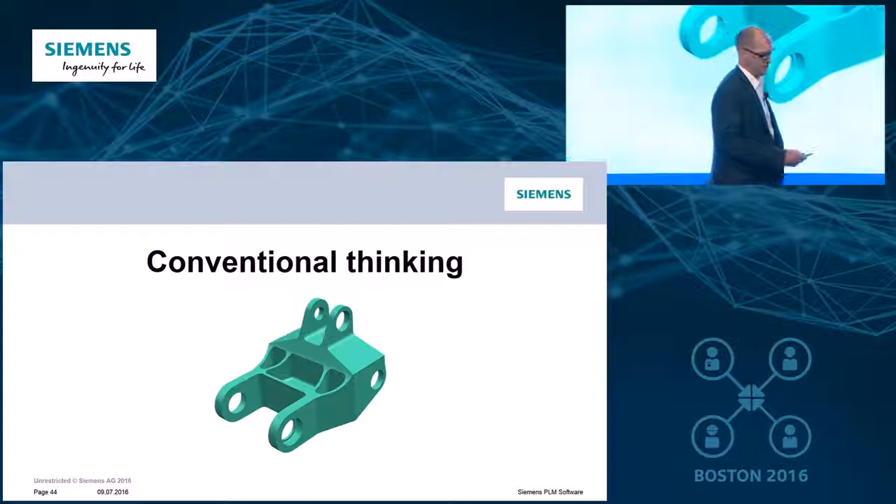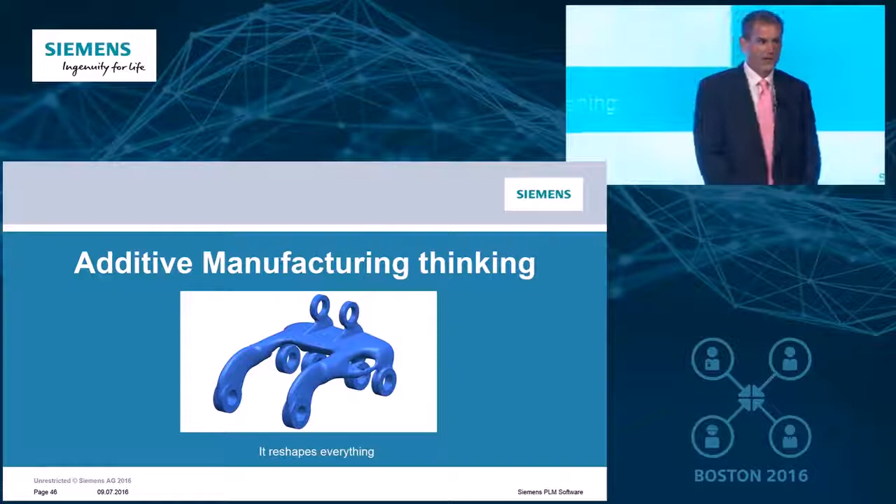Now is the time to rethink everything, and we believe now is the time to adopt additive manufacturing. With additive manufacturing, we can now create new designs that are lighter, stronger, and never before envisioned, and we can manufacture them in an agile, cost-effective process.

Here we're comparing the difference between conventional machining and additive manufacturing. On the left, you can see conventional thinking: a block of material that's been set up on a machine tool in a couple different orientations. You can see the different machining operations, the drilling operations, drilling the holes, and the machining operations removing material, so we end up with this final target shape of the part we're trying to produce.

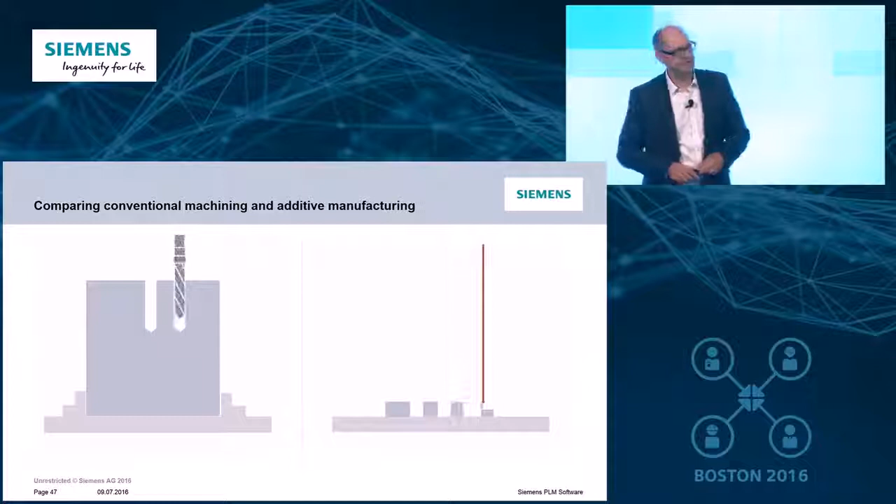Now, on the right-hand side, you're looking at additive manufacturing. Here we're able to produce a part in a single setup. The shape of the final part is very unique, very organic looking, something we couldn't have manufactured using a CNC machine tool. And on the inside of this part, you can see a honeycomb lattice-like structure where we've been able to take out a lot of material while still maintaining the structural strength of this particular component.

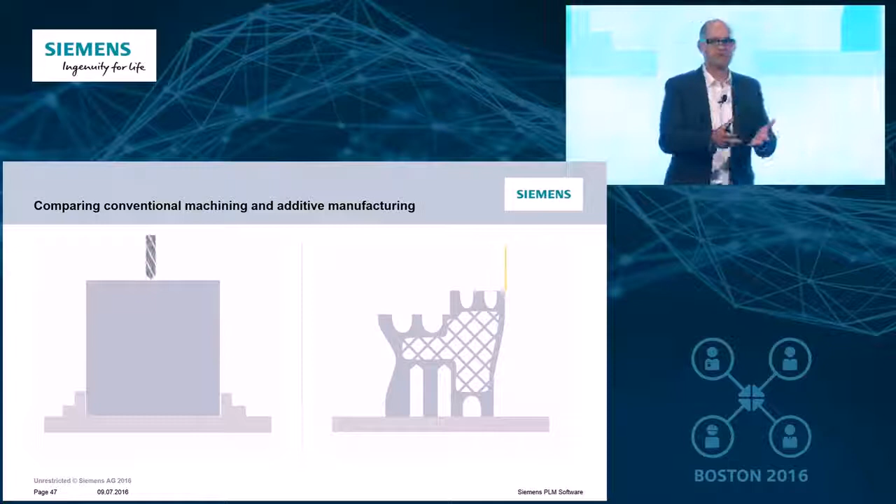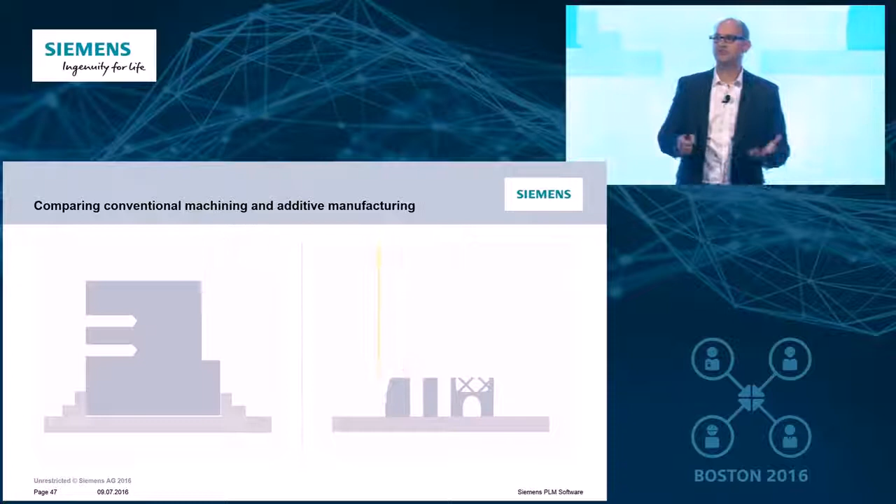It's these new types of disruptive, innovative technologies that are really going to change products forever. It's time for us to start rethinking everything.

This aircraft was designed over a decade ago by one of our customers, One Aviation, who thought differently about air travel. Using the latest technology available to them at that time, they pioneered a new class of jets, the very light jet. Aerospace engineers used NX for modeling, human-driven calculations, supplemented by CAE simulation optimizations to design a very lightweight, cost-effective, high-performing jet.

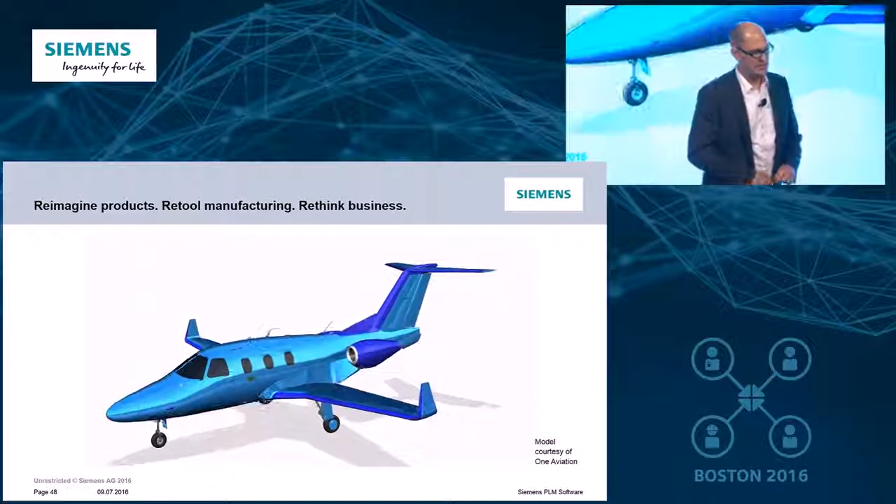But we've wondered: what if we could redesign this jet using the technologies available to us today? What would it look like?

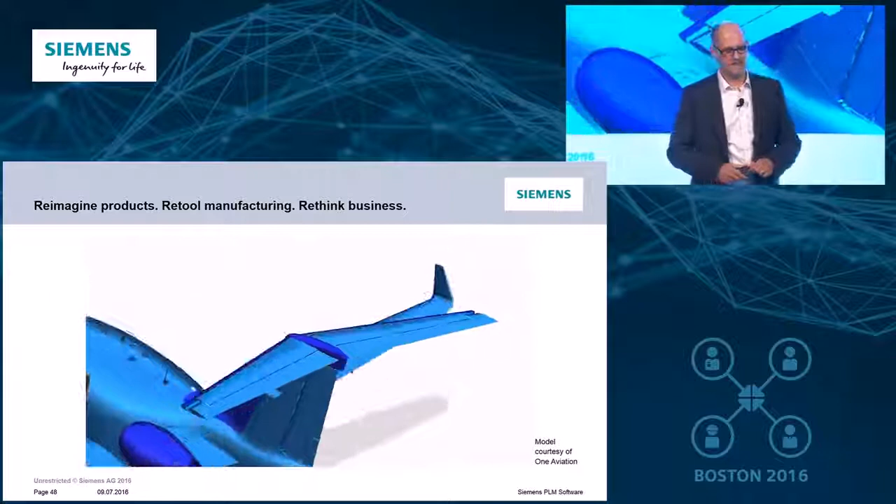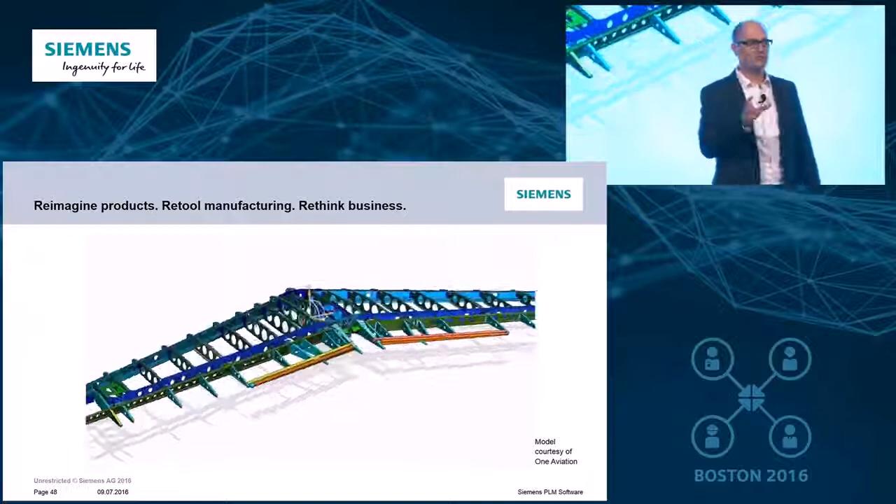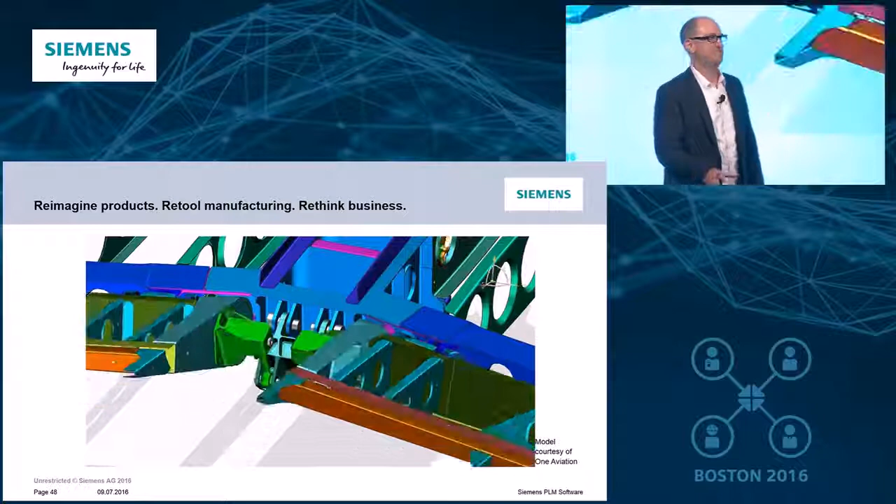Now, we don't have the luxury to redesign this entire jet today, but we can zoom in and look at one component of this aircraft, the elevator bell crank in the very rear of the tail. This is a critical component to the control systems of this aircraft. It connects the actuation of the pilot's joystick mechanically to the elevators in the back of the aircraft that control its pitch.

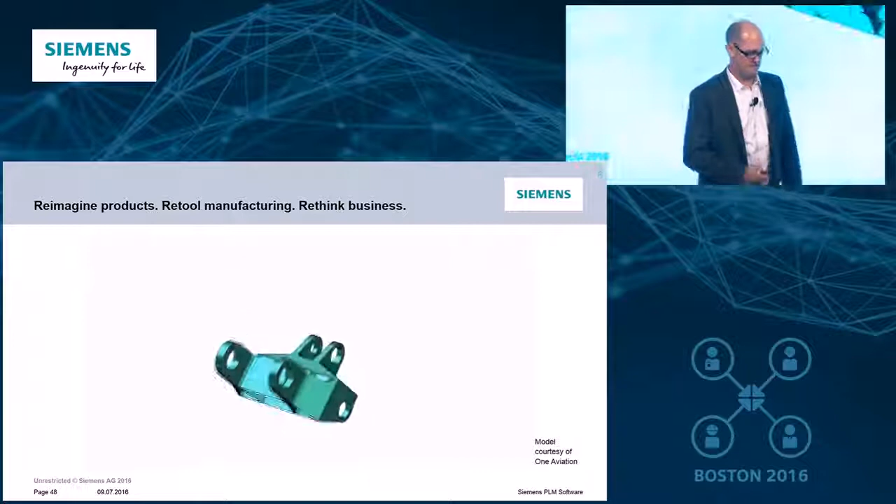So let's have a little bit of fun. Let's try to break through some barriers. Let's apply additive manufacturing to reimagine this bell crank and try to design it lighter, maybe even stronger, so that we can increase the payload of this aircraft. Maybe we can now take an extra passenger on board with us when we go on a trip.

As engineers, what we do today is set up requirements and goals using analytical methods to help us define the physics that govern product performance. We use tools like Excel, intellectual property, prior knowledge, and even Google to set up these calculations. The problem is they're not tied directly to the geometry which they need to create. We believe there's a better way to do that.

What we want to do is take all that math now and directly tie it into the geometry which it's going to need to create. So what we have is Paul now working on a change request.

What Paul's going to do is use Active Workspace embedded in NX. Being a designer every day, he doesn't have to go to another tool—it's right there, he has access to all the information he needs. The request here is he wants to lighten up the elevator bell crank.

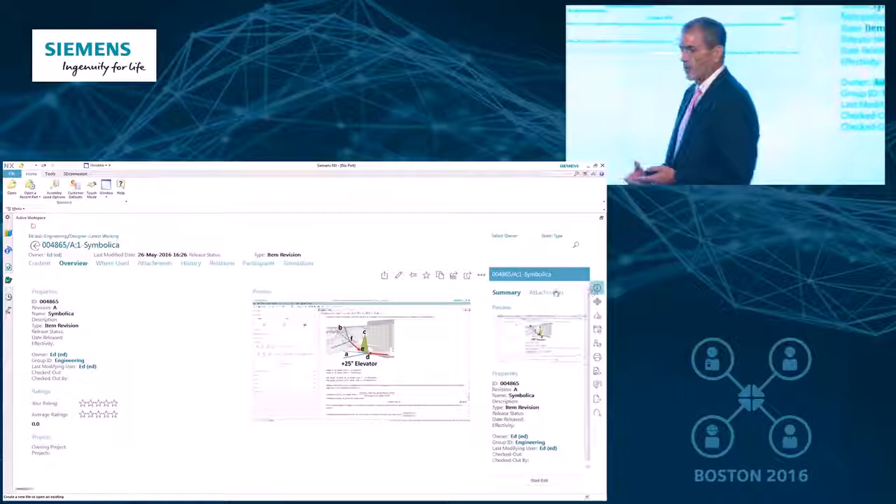As he digs down through the information that was sent to him, he comes across the set of equations and math that dictates the performance for this part. He's going to launch that part directly from inside his CAD tool into the Symbolica tool, which is the rich math engine where we can set up all the calculations we need.

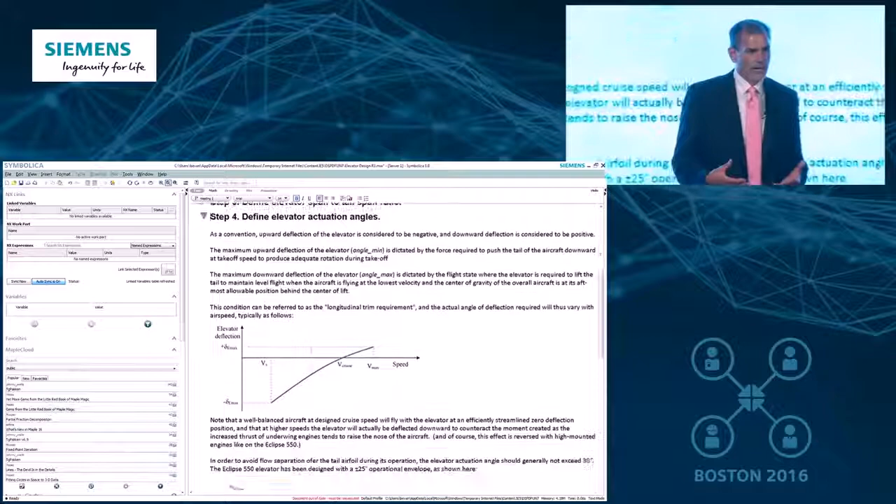Within Symbolica, it has the step-by-step processes of everything Paul needs to accomplish, and he can look at it. It has all the pictures and images pulled from CAD so he can get a nice view of what he needs to do.

What he's going to notice is it might be a little out of date, so he's going to quickly recalculate the entire set of equations at this point in time.

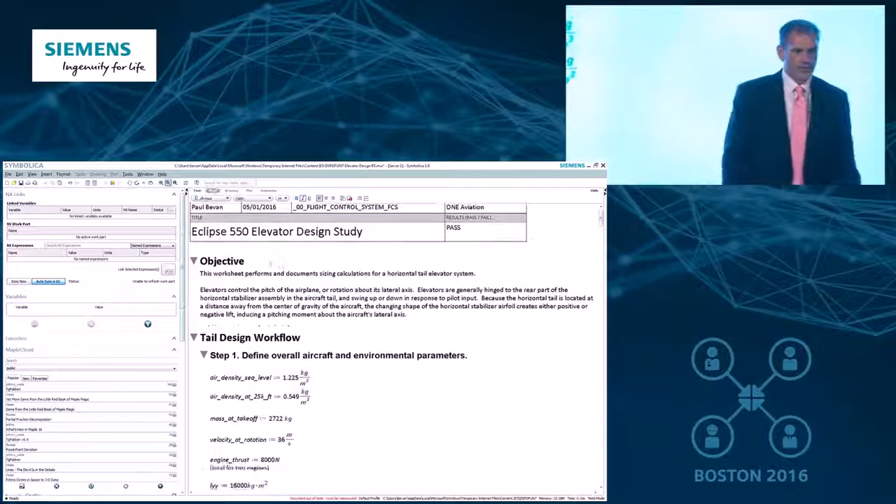As you look at that, you can see all the numbers and all the text in italics are live equations. At any point, Paul could pick on those, change values, interrogate them.

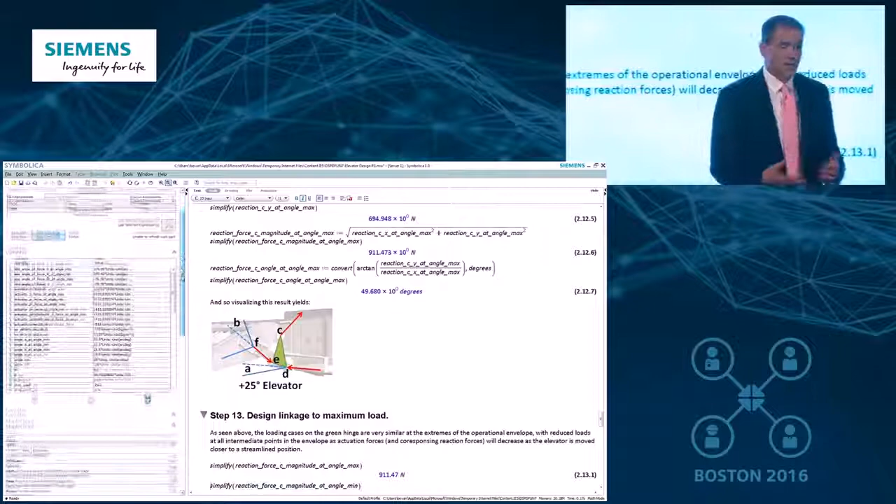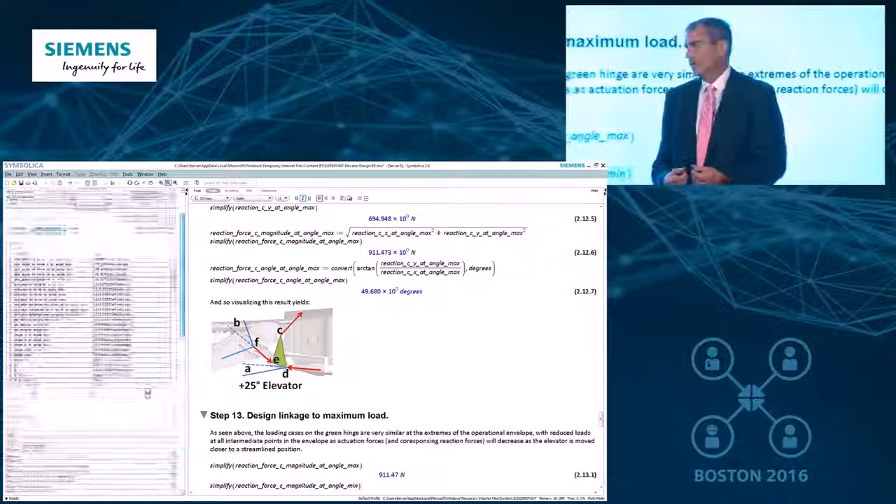On the left-hand side, he has a table listing all his variables and their present values. On the bottom, you can see all the rich math functions that can easily be put into Symbolica. And if anybody's tried to do high-level math with Excel before, you know how hard that can be.

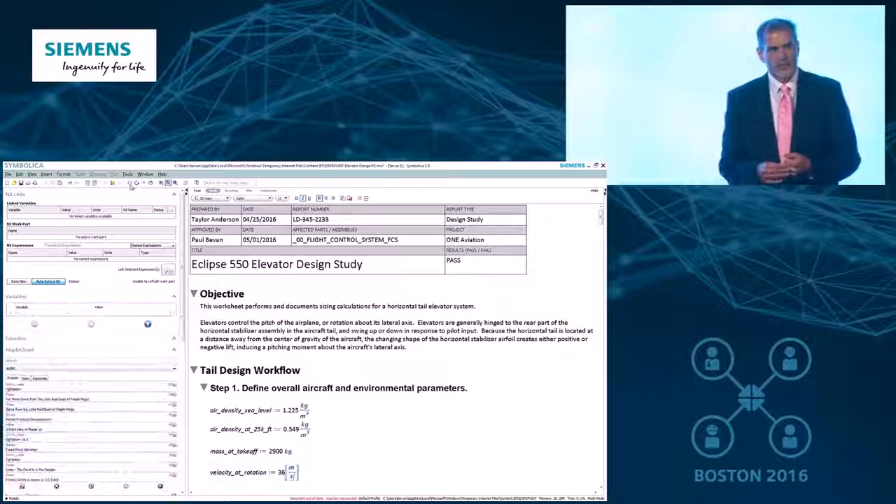The other nice thing is, as Paul increases the mass at takeoff here by a couple hundred kilograms and recalculates everything, the beauty of having Symbolica now is I can use these values and tie them directly into CAD.

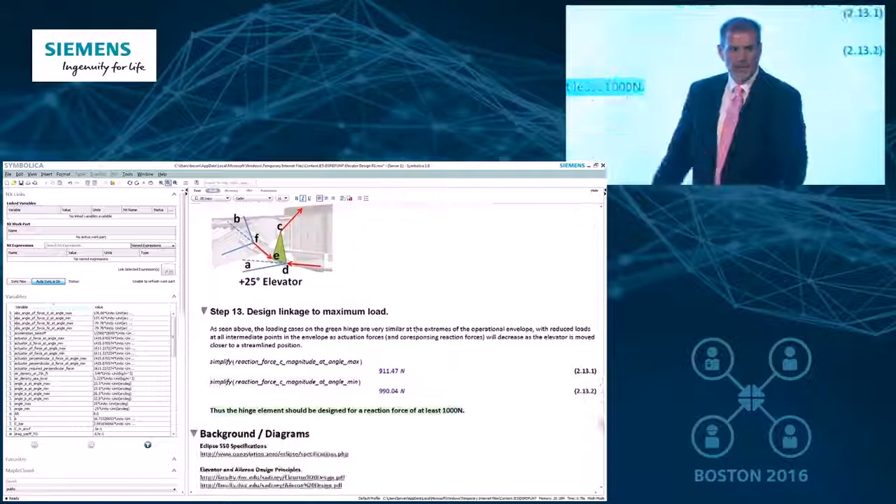And it's bidirectional. I can push these values into my CAD models, and as I change my CAD models, the values can come back here to retrigger all those calculations.

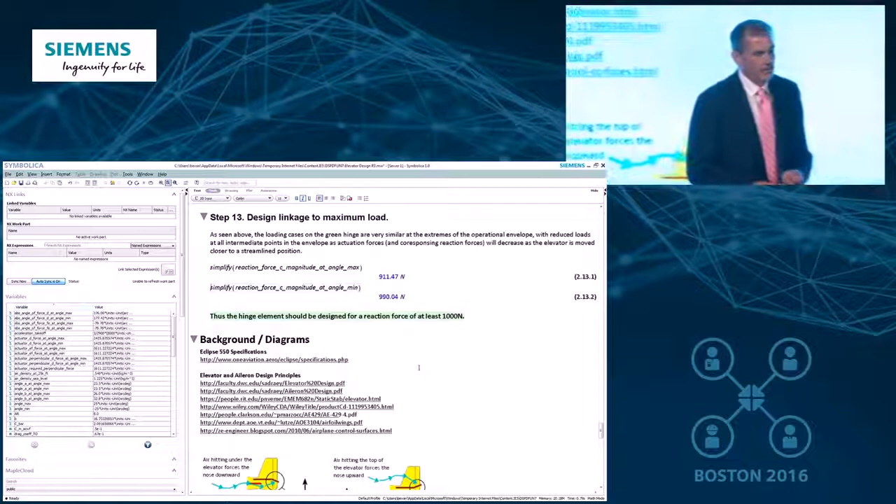So we can see now, when Paul increases the mass at takeoff, he has to worry about a reactive force on the elevator bell crank of about 1,000 newtons. We'll use that number later on in the next demonstration.

So really what we have now is intelligent models that can unleash our engineering potential within our organization. We can tie it all together.

The next step we're going to do is optimize. Today's optimization usually occurs after an initial design has been created to get an incrementally better model, and this optimization is usually performed by a CAE analyst using specialized tools after the initial design.

But this might not be the best way to do it, because these optimization routines can be biased, and they can be biased by many things. One is the existing geometry we started with. Number two is the not-invented-here syndrome, and even the emotional attachment people have to their designs.

So what we want to do is use the power of the computer and give the optimization to the designers early on in the initial design phase during ideation, where these biases can be eliminated, because the computer has no bias about existing design—it's just going to do what we ask it to do.

So what we want to do now is go back to the demo. In the next one, Paul has opened up the entire elevator assembly and he's going to focus in on the area of the elevator bell crank.

And what he's going to do, like Aaron talked about before, is imagine a brand new design. He has some stuff set up to run the optimization here, because we have to tell it what we want to do. When Paul goes into that area for the optimization, he needs to set up a design area.

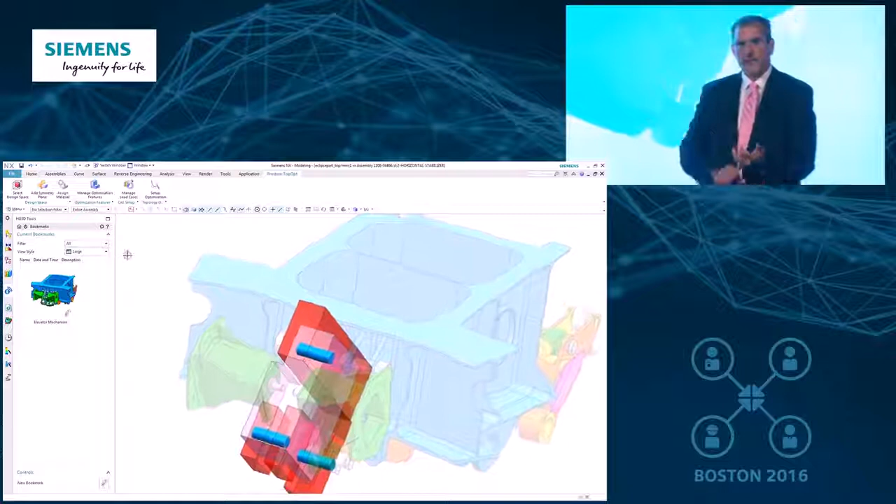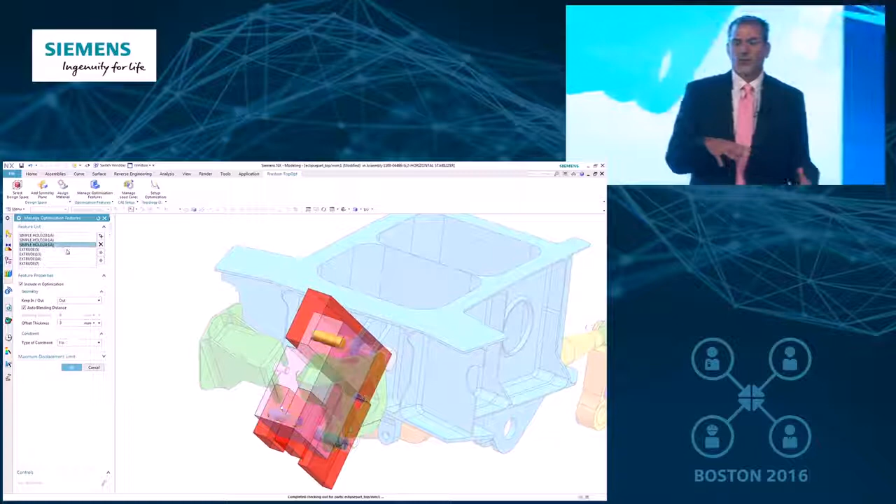He needs to set up material types, and he can add symmetry to it. The one he's going to do here now is go ahead and manage the optimization features—within this design space, what are the areas we need geometry to stay, and where can we take geometry out of?

For instance, a couple of these areas he has holes where there's going to be pins, and a couple other areas need material around the holes to put the other pins in.

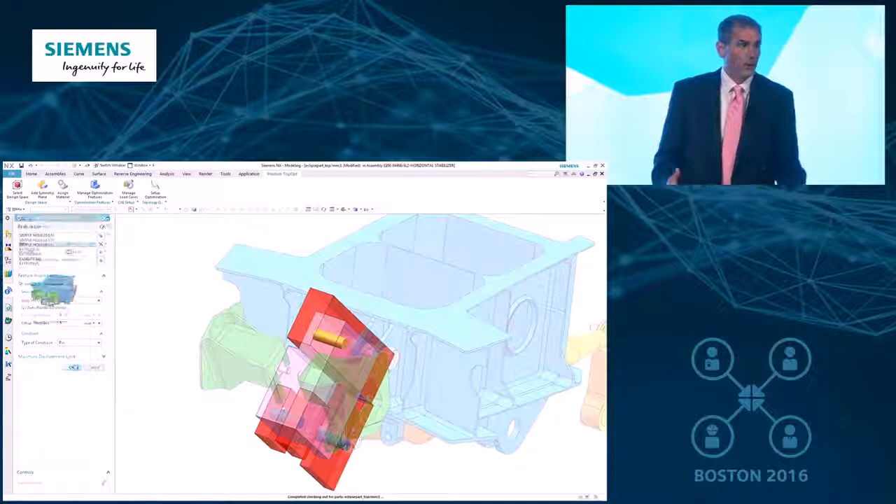Then he's going to manage the load cases, which were calculated before using Symbolica. Paul's going to go in here now and make sure all our loads are all set up, and once that's done, he's going to run the optimization as a designer now, not as a CAE analyst.

So let's think about optimization for a second, because to optimize means to make perfect. So what Paul's doing now is he's making the perfect design based on the inputs he gave it. And what does it really mean to make perfect?

One customer once told me a perfect design is like this: anyone can build a bridge, but only an engineer can build a bridge that'll barely stay standing. That means it's perfect, right? You use the minimum amount of materials to get the maximum amount of gain.

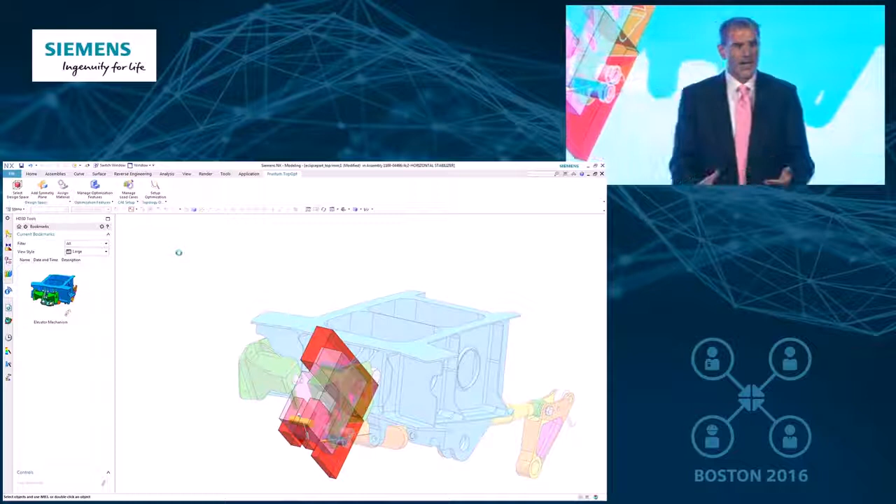The other thing it's doing behind the scenes, as Paul's doing, is generating multiple designs and multiple iterations, running through all the solutions it can do. And it's going to give us back the best solution it can.

One thing we'll notice when we're done is, remember the original part that Aaron showed? The original elevator bell crank had a kind of stress path that went along this way. And when we get the new design, you'll see how it maybe is a little bit different.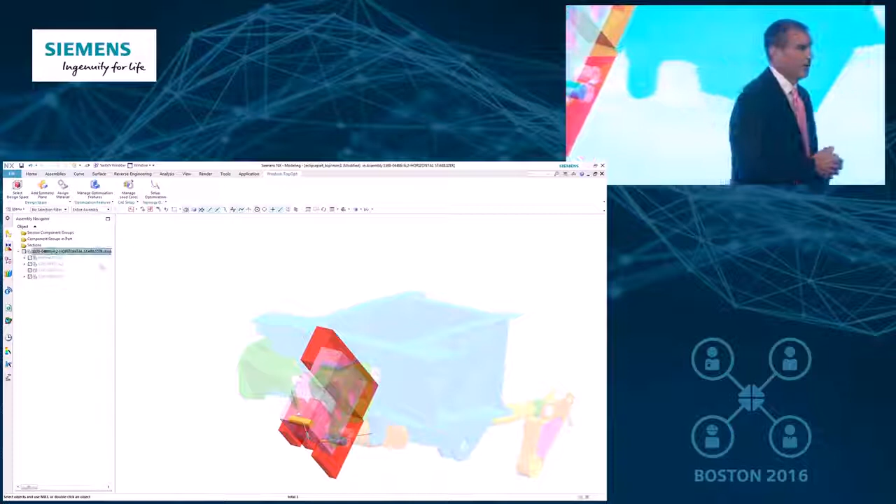So the design is all complete now, so we're going to go ahead and look at what kind of shape we came up with. And when we look at the design, not only do we talk about which way the stress is going to go through that part and where it's going to bear all the weight.

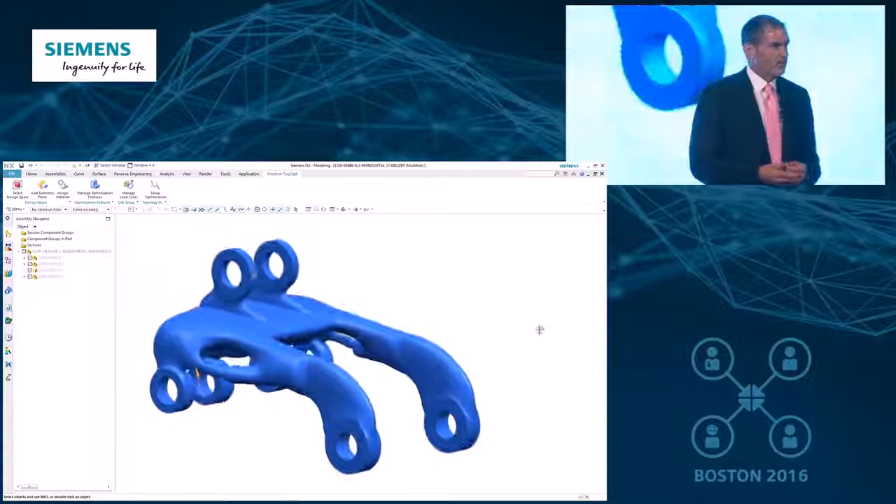Now we can optimize designs for the new generation of products. And although these designs are perfect, they still may need to be adapted a little bit.

Innovation's a team sport, and this means that we need to use tools that give us the freedom to combine and adapt our ideas that are generated by the computer, and other ideas generated in our enterprise, and be able to combine all those together and turn them into a remarkable product.

Traditionally, engineering software tools have evolved in silos based on disciplines, and they're built on data models and different specific geometry types.

And these applications tend to be optimized separately based on the way that the specialists intend to use the tools. And the problem is that these tools don't work on the same data. This means we're either having to convert models between applications, or even remodel something if we want to try to improve it. And this is what's limiting our potential, because it's slowing down innovation.

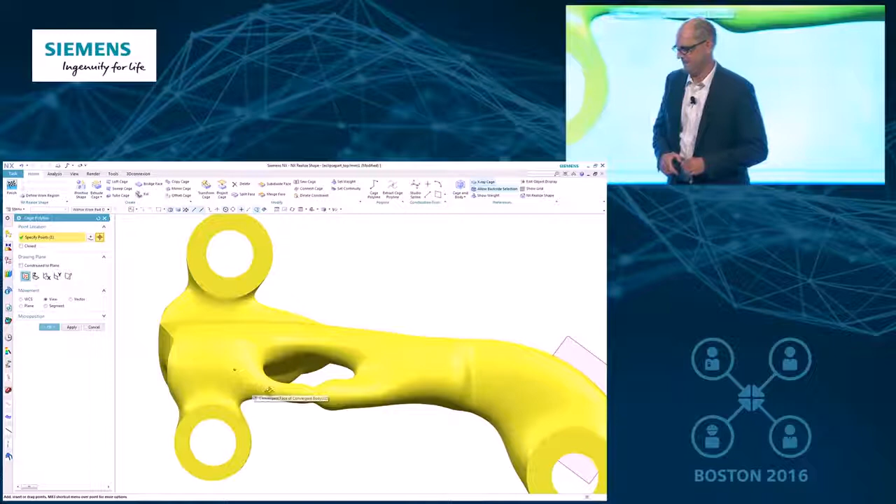So here we're looking at NX. And this is that faceted model that we had optimized for strength and weight. And Paul's going to do something quite remarkable that's not possible with traditional CAD tools.

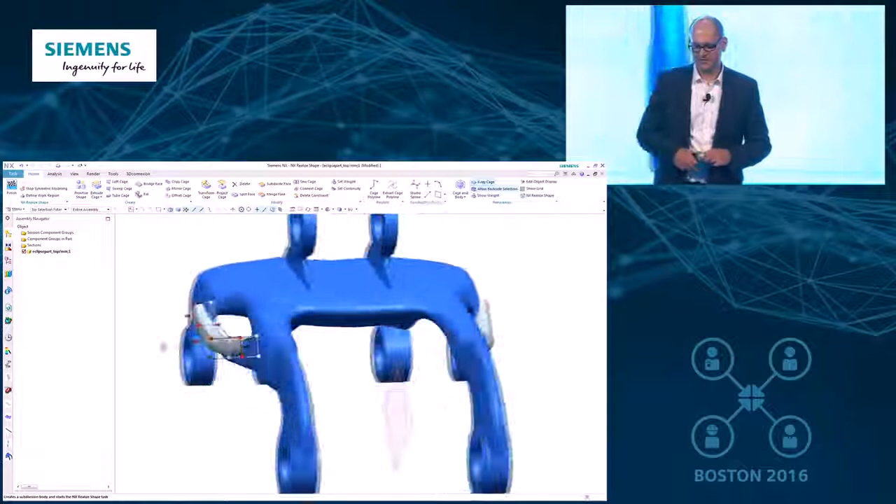He's going to use the NX Realize Shape applications to create a precise surface in an area where we believe we need to add a little bit of material.

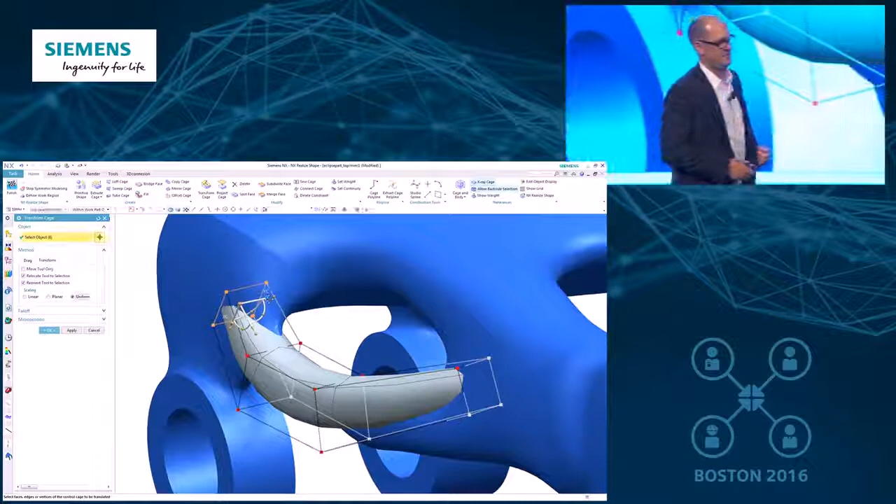Now, we didn't optimize this part for how well it's going to flow through the factory floor and potentially withstand somebody accidentally knocking it against a piece of equipment. And so we felt, in order to make it absolutely perfect based on our experience, we needed to add a little bit of material. And NX is providing us the power to be able to do this.

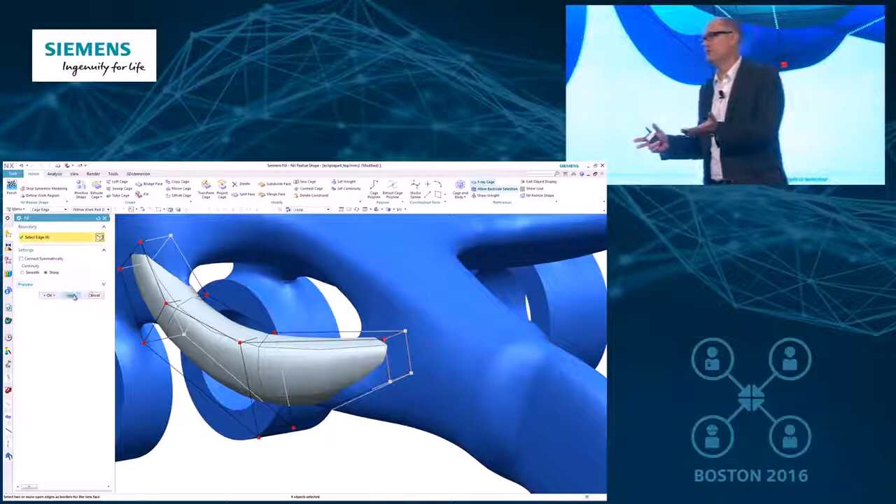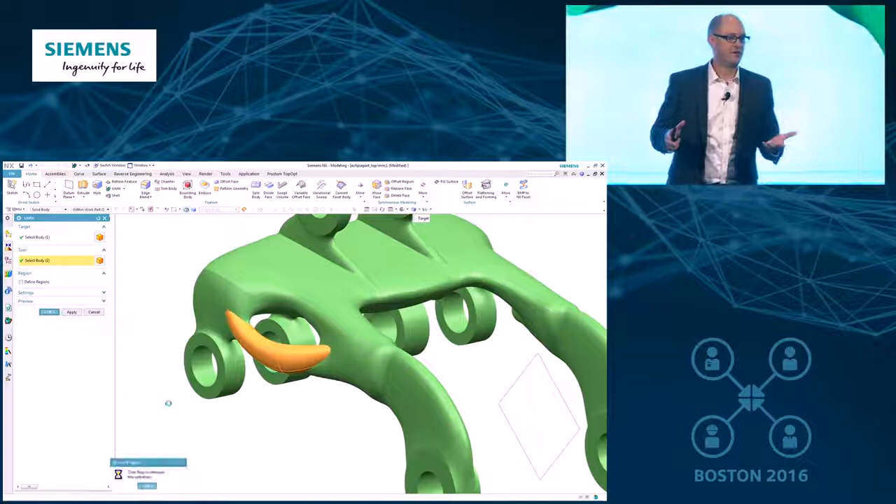Beyond that, we're seeing an increased use of faceted geometry with different shape-based simulation optimization tools, as well as models that we're getting from scanning equipment that could scan a physical product we might need to reverse engineer, or even from CT or MRI scanners that are scanning our anatomy so we can design better implants.

And because we have these powerful tools now, all inside one application where we can easily model in a mixed geometry setting, we're able to innovate faster.

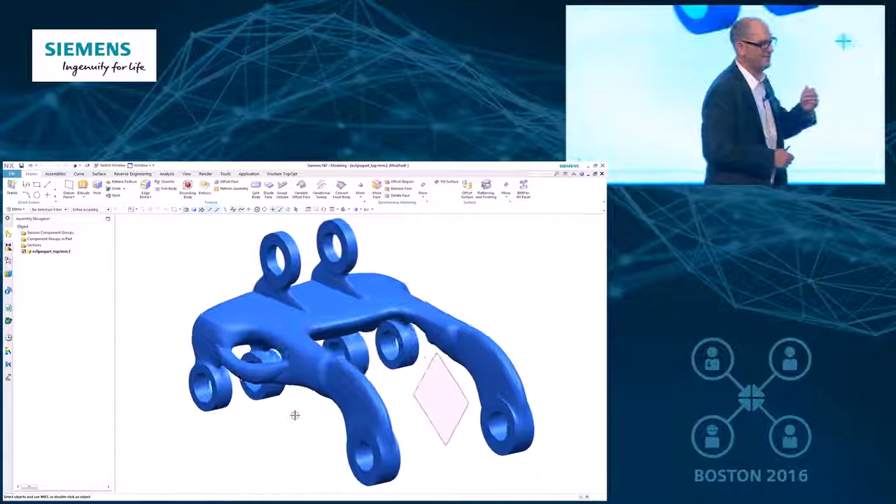And you can even start to see what's going to happen on the horizon. We're going to be able to have the ability to not only model just geometry, but we'll be able to model different types of materials all combined into a single part.

Someday providing us the ability to mix materials in a part so that we could even add sensors directly inside these parts and then have them printed so we can measure their performance. And the breakthrough here is now we're free to imagine what's possible.

Today validation occurs when we run computer simulations on the existing geometry to make sure that the results we get are the ones we really want. But as we move forward to these new methods, there's going to be an even bigger emphasis on this step of validation, because as we make these new kind of shapes, there's going to be a lot of people who don't believe they'll perform as well as the existing shapes they were trained to build. So as this becomes more critical, we need to look at all the steps of validation.

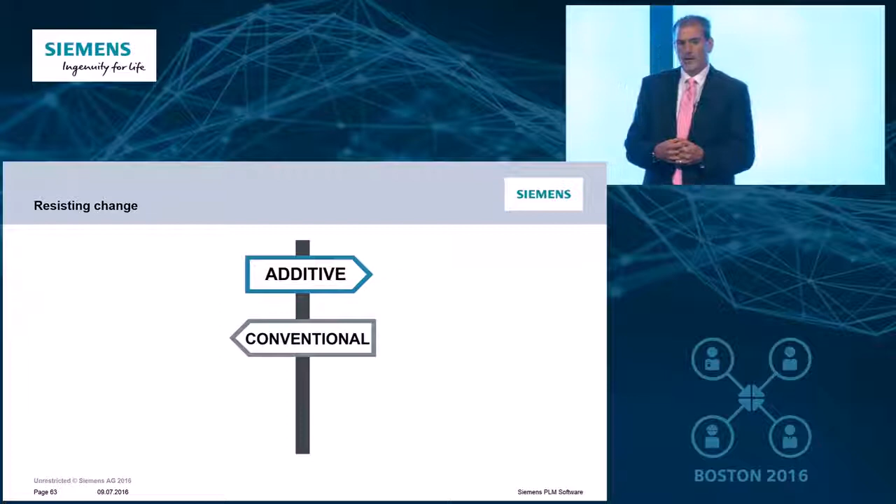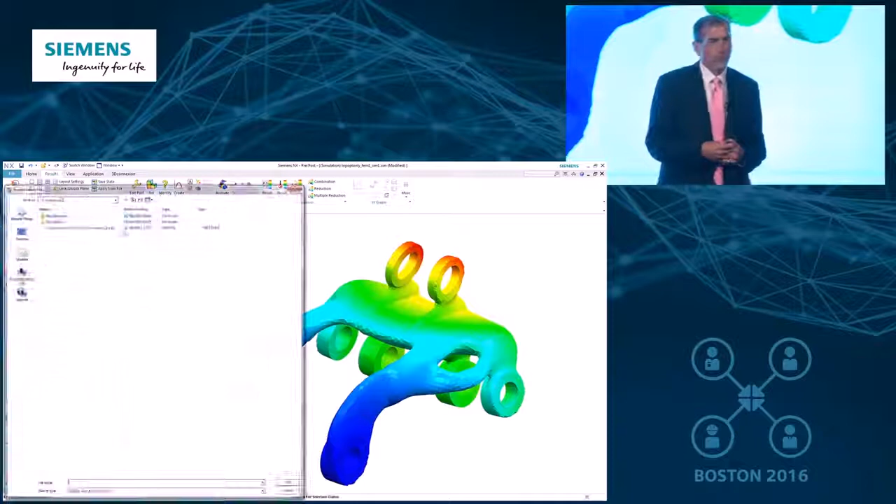What we want to do now is show how we can take the information we have from the existing parts, validate them, and prove out our hypothesis that the parts are now better. Paul has the brand new part in NX. We're going to do some 3D analysis on it, starting by looking at the deflection on the part. He's going to open the results from the original part that we still have around, and we're going to compare the results.

One thing that hasn't been noticed is this part is about a little less than 20% lighter than the original part too. He has two windows open — in one window we'll put the old part, and in the other, the brand new part. Then we'll synchronize the view so we can see what's going on.

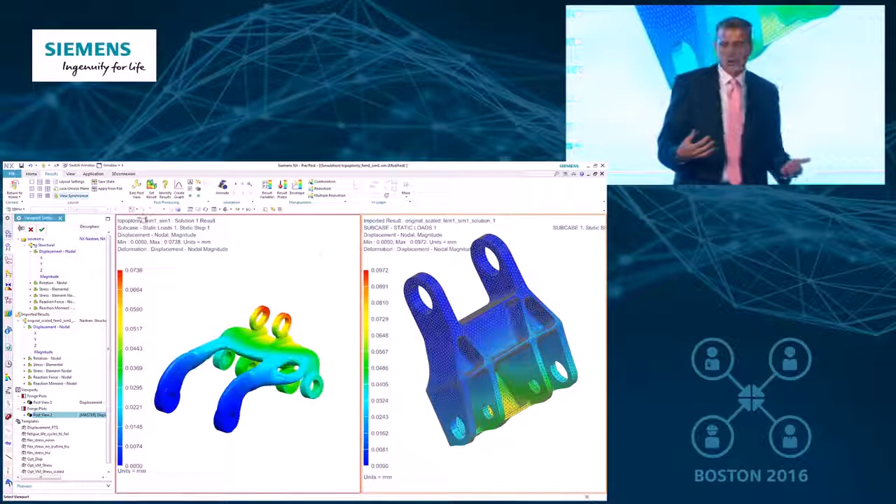The first thing we'll look at is the deflections. Paul's just going to drag a template for the deflections right onto both parts, and we can see the deflection is where we expect it to be along the pinned area.

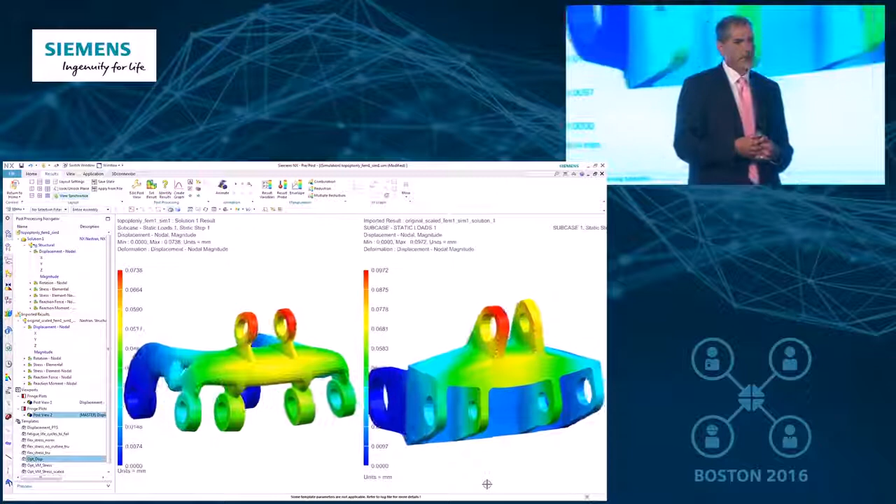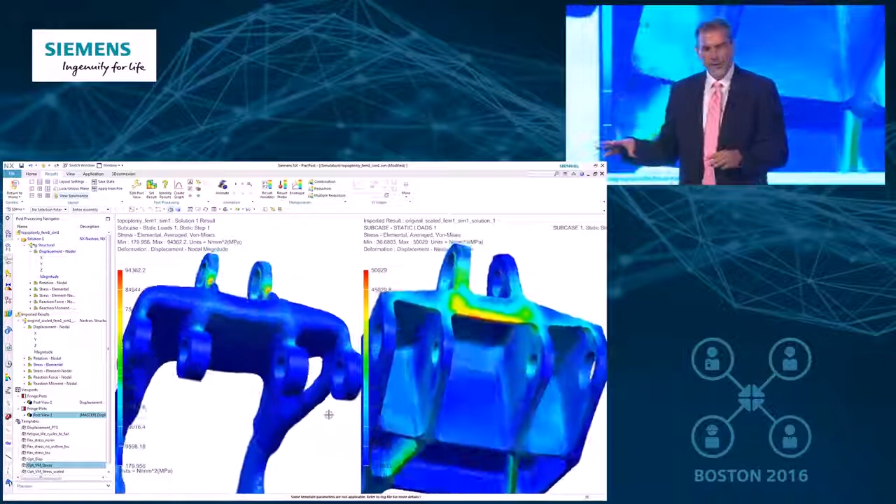If we look at the original part, on the right, you notice along the ribs we have a lot of residual stress. Traditionally, as a CAE analyst looking at data like this, we'd say, yeah, there's stress in there, and over time that might have some effect on the longevity of the part and how long it lasts. But you know what, I can live with that stress.

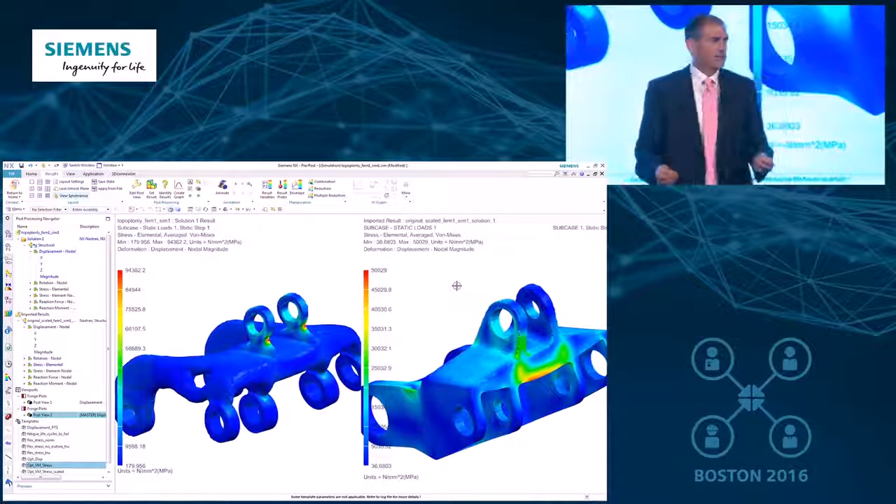But if we look at the brand new design now, we don't see any residual stress at all in the part. All the residual stress has been removed due to making it through optimization.

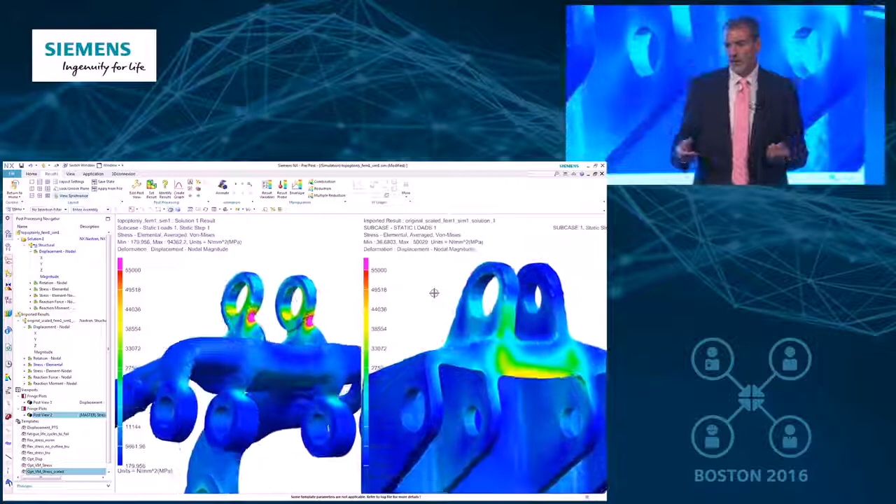If we want to take it one step further and compare apples to apples — because you'll notice the scales aren't the same on both — we'll apply the exact same scaling for the stress to both parts. And we can see now that stress is really concentrated just in that little bit of knockout on the back where we had to pin that thing.

And we have more area in there, so really what we'd do now is go back and use those TopOpt techniques we had before to add some material here and reanalyze this part to even eliminate all of that stress. Then we'll have almost practically a stress-free part, and we can show everyone, yes, we can meet the criteria we're looking for.

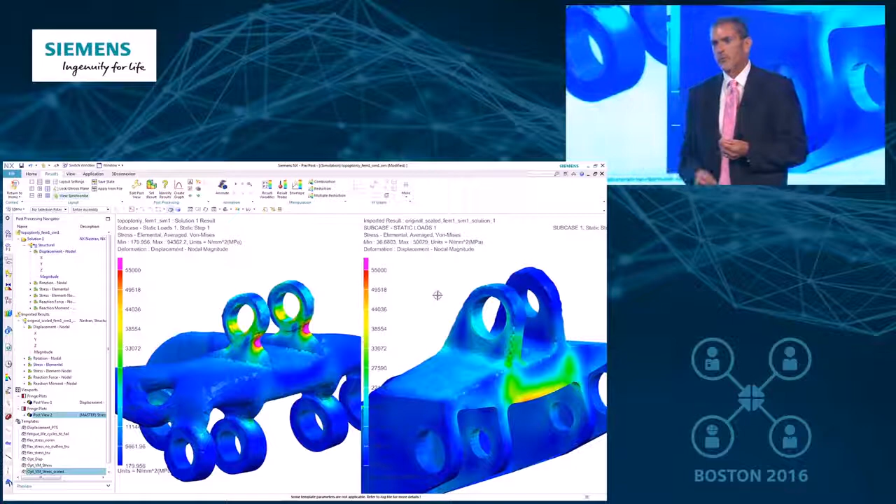So the breakthrough here now is that we can embrace the shape of things to come.

Now that we've designed and validated the performance of this part, it's time to make it. And manufacturing is where companies make or break their business. So to compete, manufacturers need to deliver on innovation faster, drive down costs, and do all of this while delivering nothing but perfection.

When we talk to a lot of companies, we often hear how companies are trying to improve the performance of their business by annual incremental improvements. And unfortunately, we believe that this way is a bit limiting.

So we also hear from a few companies that are adopting more disruptive innovation types of approaches, like additive manufacturing, that can enable them to leapfrog over the competition, similar companies in their same class. So we believe it's important to start retooling manufacturing and start adopting these types of disruptive additive manufacturing approaches.

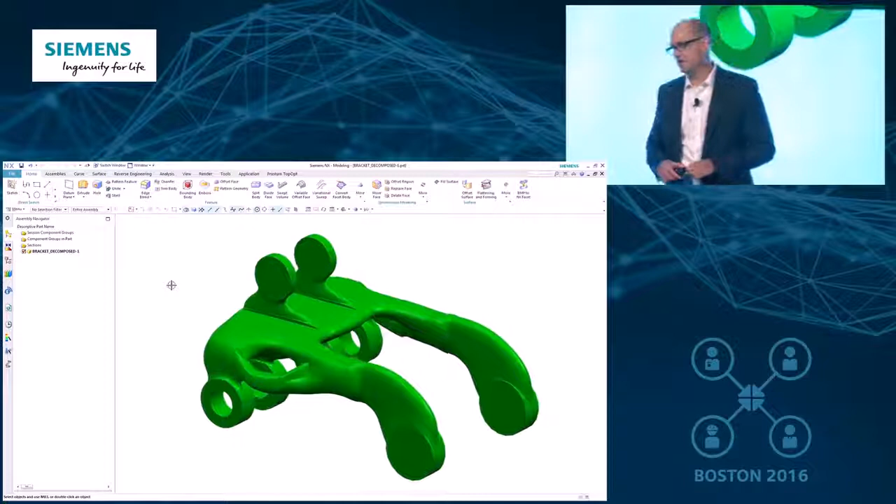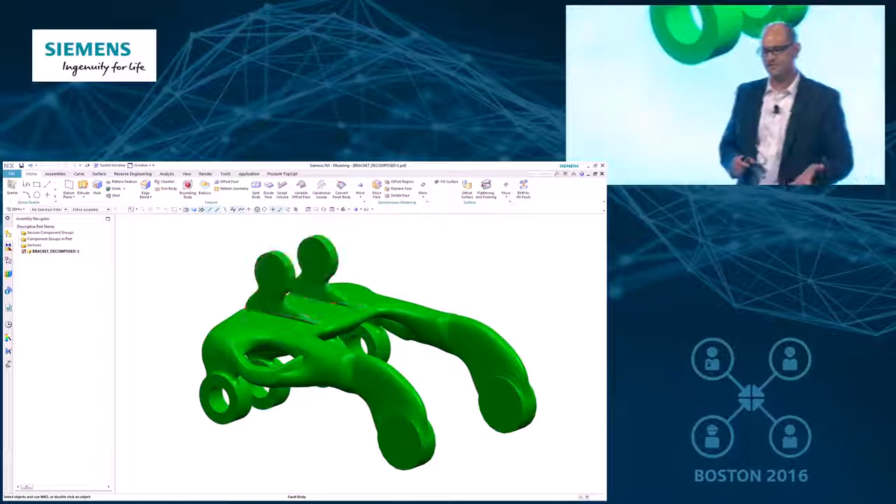What you're looking at here is our optimized part inside of NX, and we're going to use an application that we've been working on with a partner, DMG Mori, one of the world's largest machine tool manufacturers. It's an application that we can use to not only do 5-axis CNC programming on a machine tool, but this machine has been equipped with additive manufacturing capabilities.

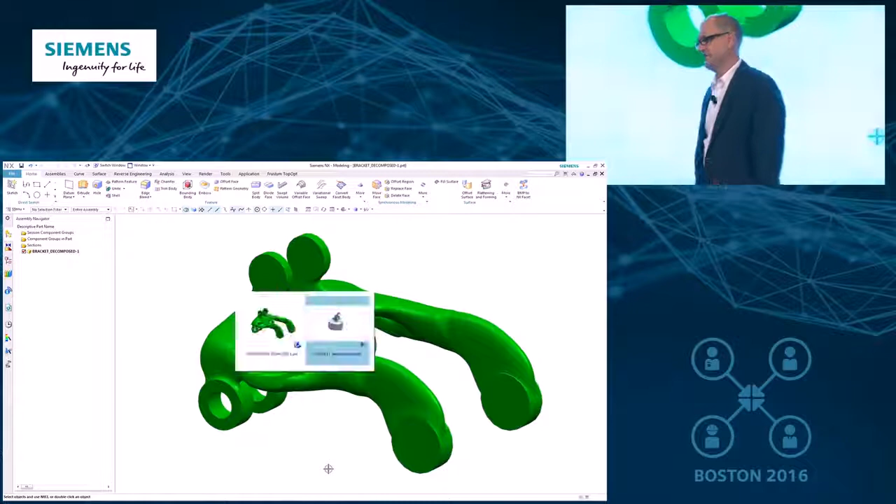What Paul is showing you here is that we've subdivided this model into its regions that we need to go ahead and build. We'll go ahead and take this into the machining environment. So we've set this part up on our hybrid machine tool that combines both CNC machining and additive manufacturing capabilities, and we've created the tool paths.

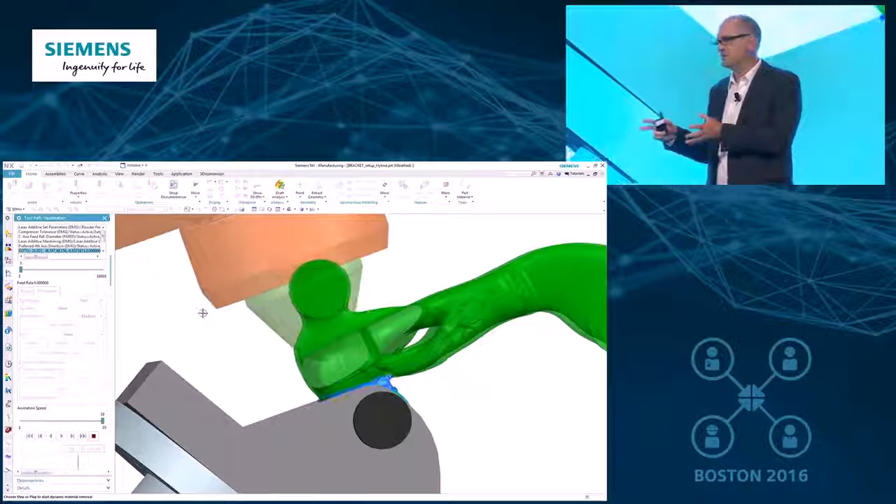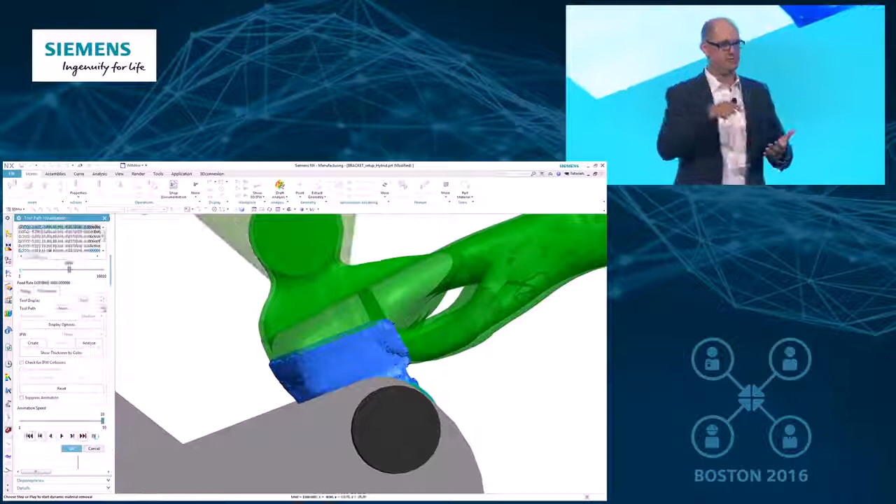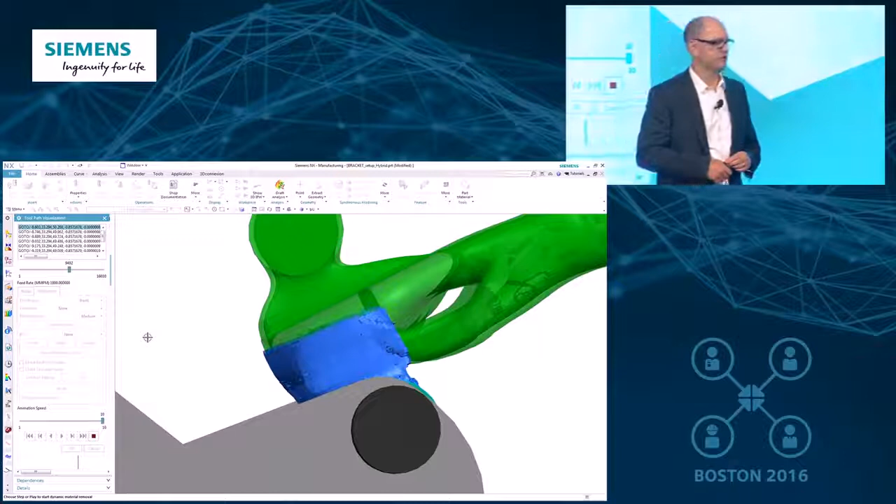Now what we're going to do is run through a simulation to visualize the deposition of material. The way this machine works is it's equipped with a nozzle that blows metal powder and then uses a laser beam to sinter, to basically fuse that metal, weld it into a solid shape. And what you're seeing here is our optimized approach to grow this part.

We take into consideration how this part is going to be heated and cooled, and how that thermal expansion is going to affect the performance of what this part's going to look like.

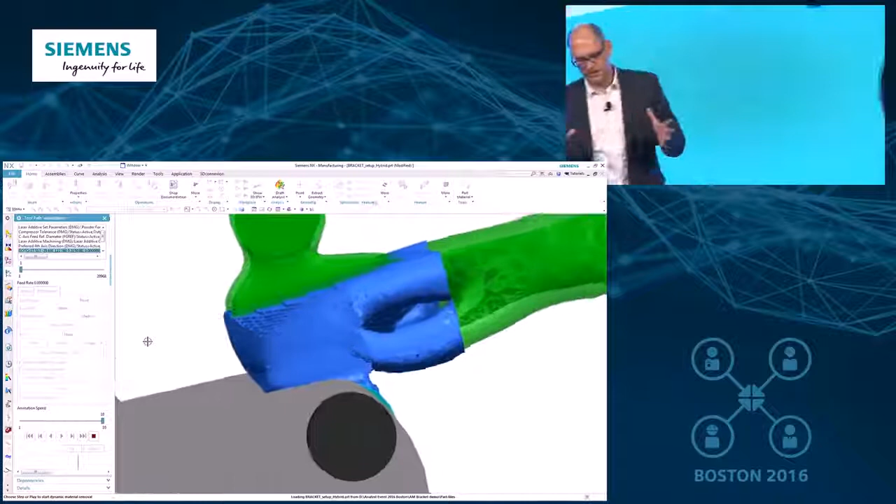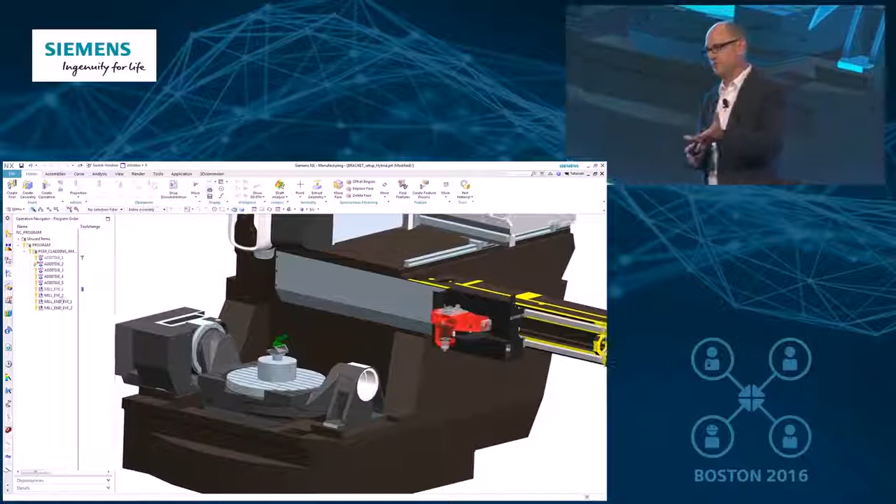Now, as we continue to visualize what this part is going to look like as it grows, we can get a good idea that its surface finish is going to be rather coarse, which is what we would end up with. If you go next door to the showcase, we have some examples of parts built on this DMG Mori 5-axis machine, comparing the surface finish of something that we've printed and something that we've actually machined.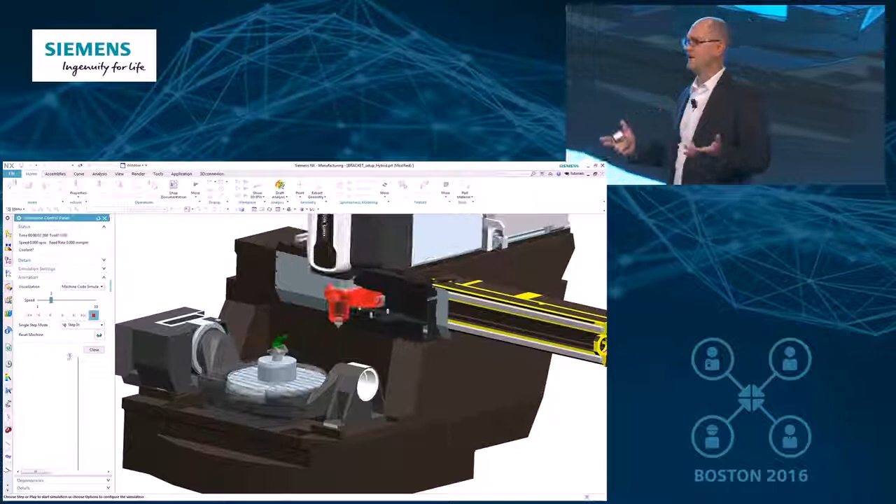Once we've finished doing the printing of this part, we can then switch the tools and take advantage of the very precise 5-axis machining precision of a very high-end CNC machine tool in order to machine the surfaces to the exact tolerances and the surface finishes we're going to need for an effective product.

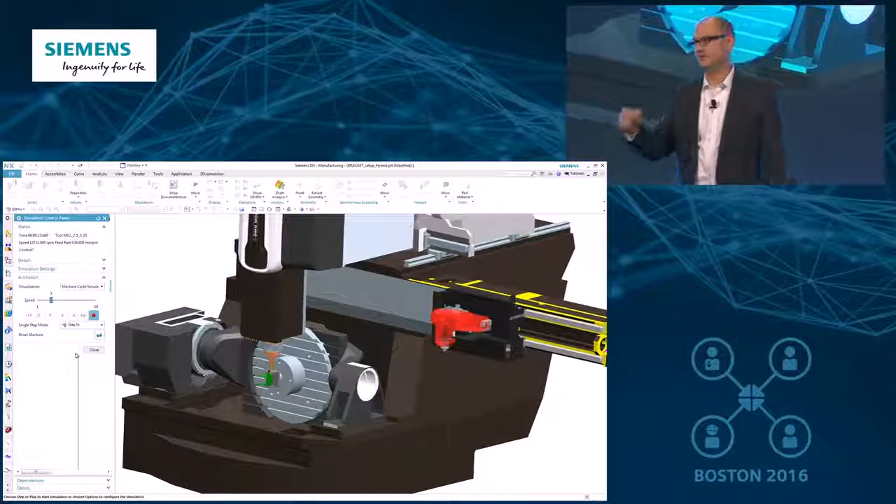And here you're basically looking at a simulation of the material removal. You get an idea of how we would machine this part to get that desired end result.

Now, additive manufacturing also affords us a completely new level of flexibility. These types of machines don't have large footprints. They're able to combine together multiple operations that could require a number of machines to produce parts like this into a small area of the shop floor.

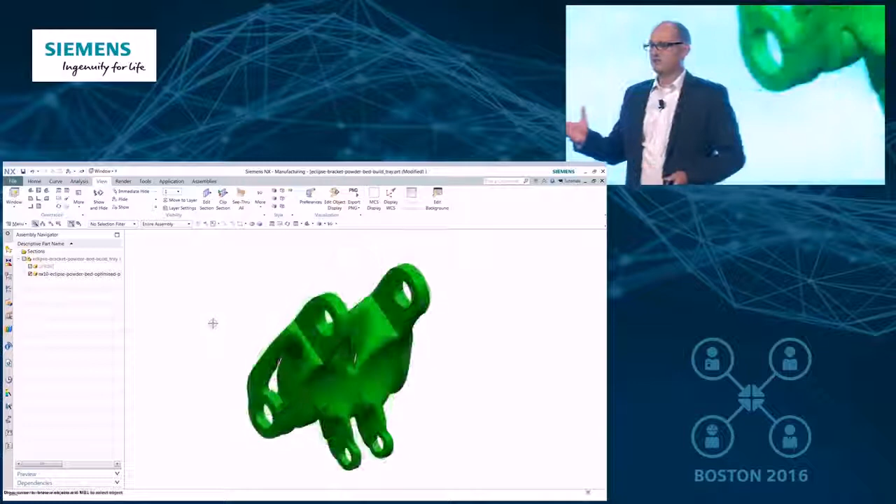And we could have these types of machines strategically placed all around the globe. So if we had to go service our aircraft someplace, we'd be able to print a part where we needed it. Let's say we had to service this aircraft and replace this part, and this aircraft happened to be on the other side of the planet, where we didn't have a DMG Mori machine tool, but maybe we had a powder bed machine tool.

Now we can tap into our digital inventory of parts and pull out that design in the location where we have this powder bed machine where we need to service that aircraft. And we've already adapted its design for the way that we're going to need to be able to manufacture it.

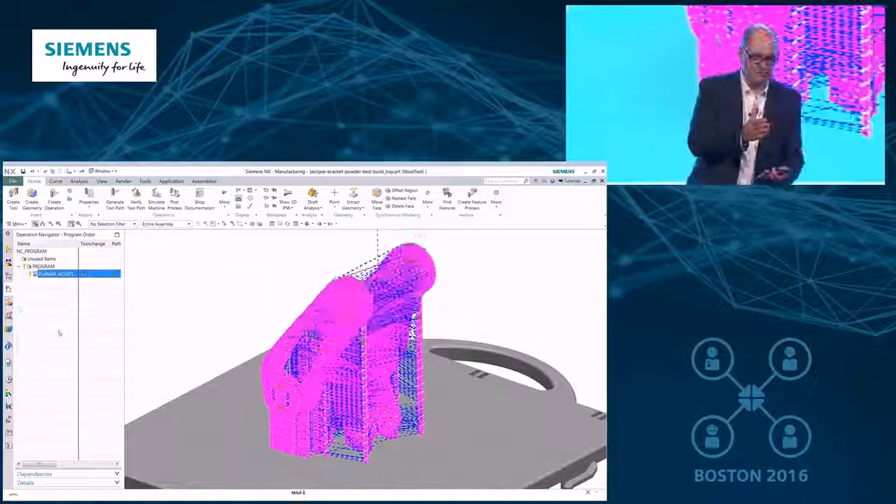We've set it up on the build tray of a powder bed machine. We've designed in the support structures that are going to have to hold it into place. We need support structures because the way a powder bed machine works is it basically spreads a very thin blanket of metal powder across the bed, and then we use a laser in one direction to fuse that metal into shape, and we basically end up growing these parts vertically. So we have to be able to somehow orient and hold them into place.

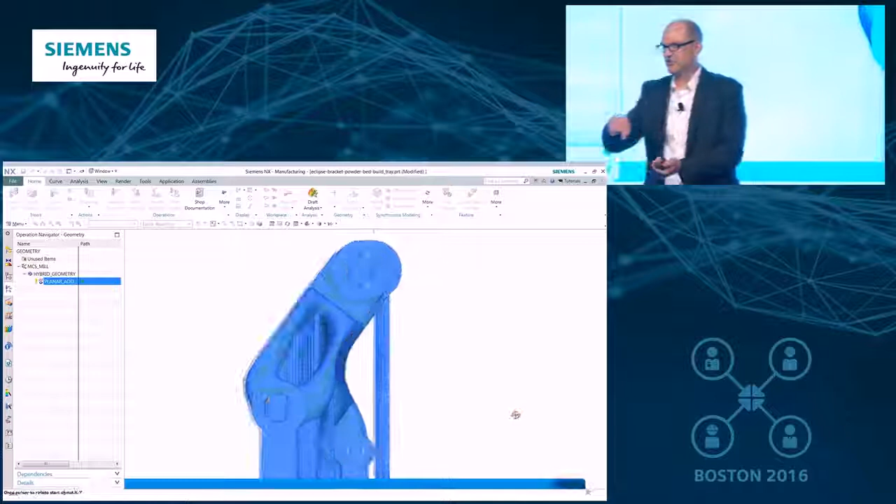We've designed in the support structures. We've done the planar slicing and the hatching that is going to control where this laser beam needs to go in order to grow our part right there on this machine on the other side of the planet. And then the next step of the process would be to clean off the support structures, and then we'd be able to service our aircraft.

And so this way of manufacturing enables us to manufacture and make products in a new way, and unleash our potential, not only in manufacturing, but also in design. And so now we have the power to reimagine the products of the future. And the time is now. Thank you.